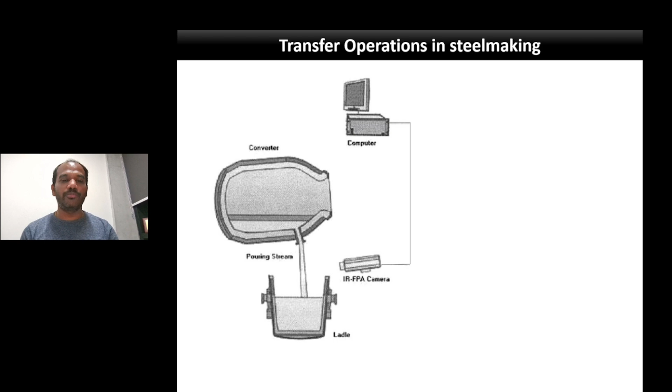So moving into the topic, we can see transfer operations are very important in steel making. There are several places where transfer operations take place. We can see transfer of liquid steel from BOF converter to ladle, also transfer of liquid steel from electric arc furnace to ladle, which is named as the tapping process. This takes place at the primary steel making section. As soon as the crude steel is produced, the tapping operation takes place to transfer the liquid metal from one vessel to another vessel.

Another transfer operation that takes place in the steel making process is during continuous casting, where the liquid steel is transferred from ladle to tundish, and then tundish to continuous casting mold. So the difference between these two transfer operations is that one takes place at the early stage of steel making, and the other, that is teeming, takes place at the later stage of steel making.

In case of teeming, mere entrainment of slag itself is very dangerous, because that is going to give you exogenous inclusions in the steel products. However, in case of tapping, you can allow some slag carryover to some extent, because the slag carrying over from converter to ladle will be at a high temperature, and it can help in dissolving some fluxes, and it can cover the liquid steel so that it can prevent reoxidation and so on. So there are some advantages to that.

However, the disadvantage is that the BOF slag carrying over into the ladle has a lot of excess oxygen that comes from reducible oxides like FeO, MnO, P2O5. So there is always a trade-off of how much slag carryover to allow, and for several critical steel grades, slag-free tapping is demanded as much as possible.

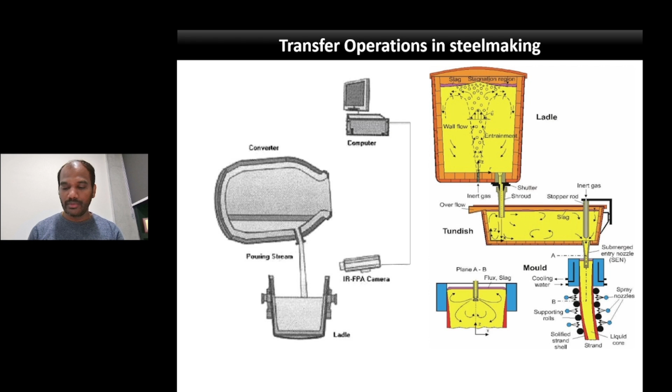So our work primarily focused on the tapping process, that is the transfer operation that involves the transfer of liquid steel from converter to ladle.

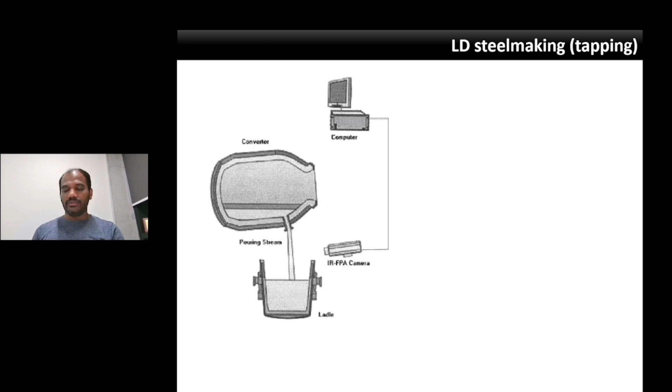We know that crude steel is produced along with BOF slag, and during tapping, generally there is a practice that deoxidizers are added - aluminum, silicon, manganese - and some amount of slag formers are also added, like calcium aluminate slag, some synthetic slag of different compositions, and so on.

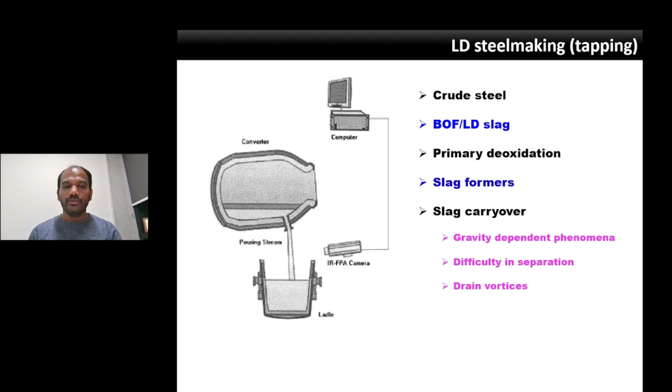So as soon as the tapping is going to be over, at the end of the tapping process, because of a gravity dependent phenomenon, vortex formation takes place. And once this vortex formation is incepted, the upper phase, that is the slag, gets carried over into the stream that is going into the ladle. So this process is basically called slag carryover.

There is a difficulty in separation because it is highly gravity dependent, and the drain vortices, which are beyond the control of any operator, form for a lot of reasons. So all these things make slag carryover one of the complex phenomena in the steel making process, which requires very precise control to ensure the quality of the steel.

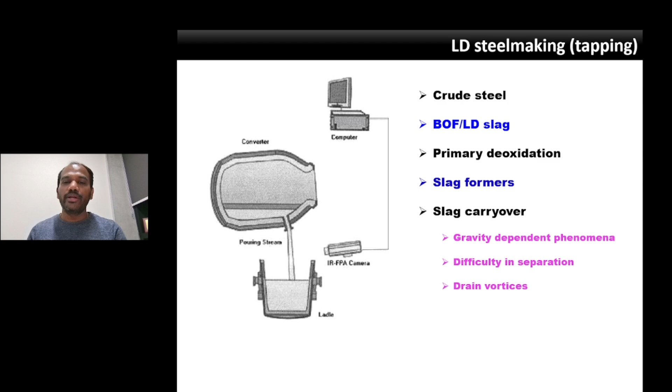There are control methods available. We can see here a dart, which is a device placed at the top, right above the tap hole, and which has a specific gravity between the slag and liquid steel, expected to occupy the interface so that the drain vortices can be destabilized.

And there are IR cameras, as shown in the slide. This IR camera will be focused towards the stream, and the thermal imaging will be continuously obtained. Once the slag is entrained, the thermal images signal will be different, so that the operator can take action by tilting back the BOF converter. These are how today's practice happens in the steel industry for control of slag carryover.

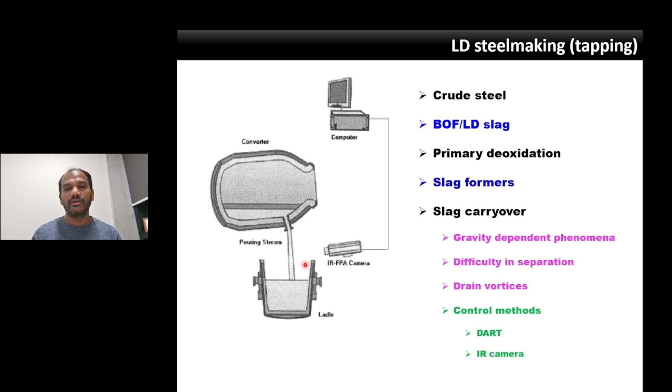Given this background, we will be moving into the problem definition that is defined here. You can see the slag carryover during the tapping process. That is one of the phenomena that is very much of interest here.

Through vortex formation, the slag carryover takes place, and as soon as the liquid steel stream is exposed to the atmosphere, the stream will be attached to a hot air film, and atmospheric air will be entrained through this stream, and there is oxygen and nitrogen transfer into the liquid steel from the atmosphere. This is the second phenomena taking place when the stream is exposed to atmosphere.

The first phenomena is carryover of an oxidizing slag, and the second is the entrainment of air and diffusion of oxygen and nitrogen through this boundary layer. Finally, the liquid steel can be cylindrical, or it can break into multiple droplets, and the surface area increases, which can encourage more entrainment.

So if you see this process, a lot of excess oxygen is basically going into the ladle. Oxygen inputs: one is through slag carryover, another is through atmospheric interaction, and another is dissolved oxygen always present in the crude steel. These are all the amounts of excess oxygen which will cost your deoxidizer in the later stages, all coming into the ladle during the tapping process.

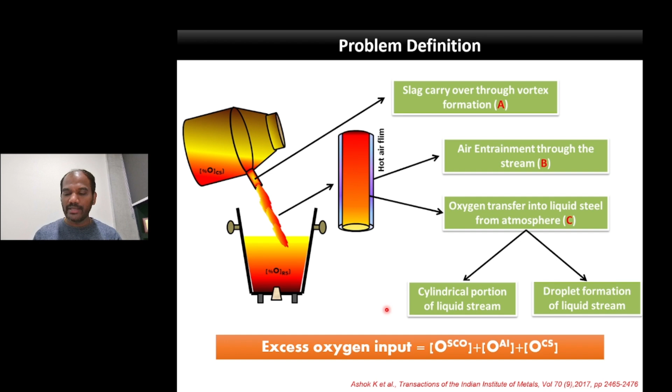In order to do that, you need extensive data from the industry. Looking at the process of tapping, the inputs of this process are the initial temperature, tapping temperature, and the crude steel composition. The BOF slag weight going in is what is going to be my unknown, which I am going to calculate through FactSage calculations. And the tapping additions, how much is added in every heat: deoxidizer, lime, synthetic slag, these all.

Crude steel composition also - it's not always possible to get the weight percent oxygen. So we have computed it in such a way, the program is set up in the equilibrium calculations so that initially we will also calculate the weight percent oxygen, and then go for estimation of slag carryover.

So finally, the output of the process is the LF temperature. Once the tapping temperature and after the process, once the ladle reaches the ladle furnace, what is the temperature? That is the final temperature for our calculation in the equilibrium module.

And the refined steel composition and the weight percent oxygen, including the weight percent oxygen, and the final slag composition weight - so this is basically an input. The list of inputs, if you give in an equilibrium model, this list of outputs basically comes out through the equilibrium module of FactSage.

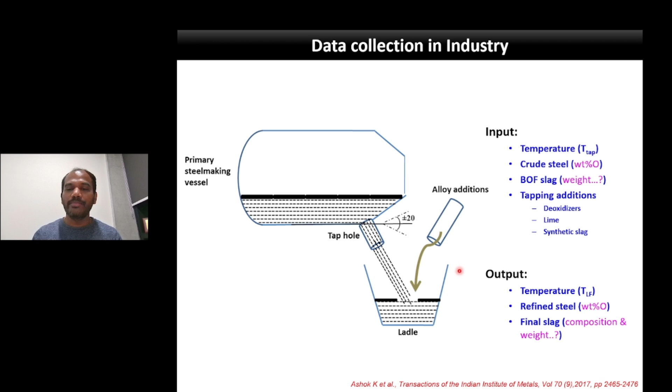Doing some exercise, one can calculate it's basically an equilibrium, thermal and mass balance along with the chemical reactions. One can perform this calculation and then estimate basically the slag carryover. I'll just explain in the next slide how that has been done.

As I told, the equilibrium module is what is used. That is basically the heart of this calculation. Begin with you have to go from this green box first - you start the simulation process. You give the input of steel composition, slag composition, and the tapping temperature, get into the equilibrium module, and the output is calculated.

Equilibrated steel and slag composition at tapping temperature - this equilibration is essential here because to estimate the weight percent oxygen exactly present in the liquid steel, because that is most of the time unknown in the steel industry.

For all the inputs, what they generally may know is the final carbon content. So given this carbon content, equilibrating the liquid steel, that is the crude steel, with the slag composition, and estimate what is the weight percent oxygen present in it.

The close bracket with the A, that we put as a variable, and then deoxidizers whatever added in the tapping process, like silicon and manganese, all these things can be given as an input again into the equilibrium module.

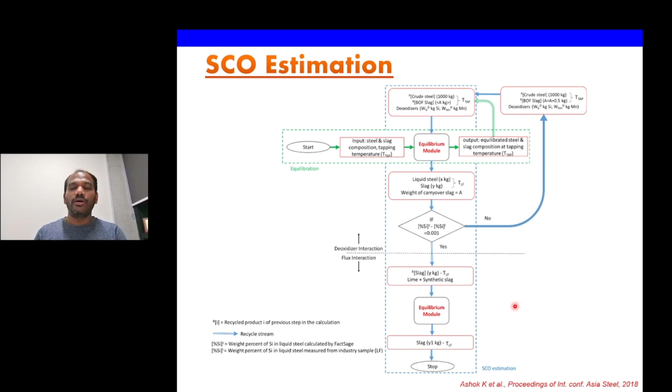So the results are given here. Close to some 150 industry heat data we have taken, and then we computed through FactSage, and then we could calculate the slag carryover amount. You can see that varies from 0 to 6 kilogram per ton, and different grades are given here.

With respect to different grades, we can see some grades are always lower, and some grades actually increase, and the grades are arranged in such a way that the slag carryover increases from 2 kilogram per ton to 6 kilogram per ton.

But interestingly, if you note down these grades, which basically talk about it as you move from left to right in this direction, the end carbon and the end phosphorus are less when you are moving from the left side to the right side.

It means if the BOF practice involves maximum carbon and phosphorus to be removed, then basically you are ending up with more slag carryover.

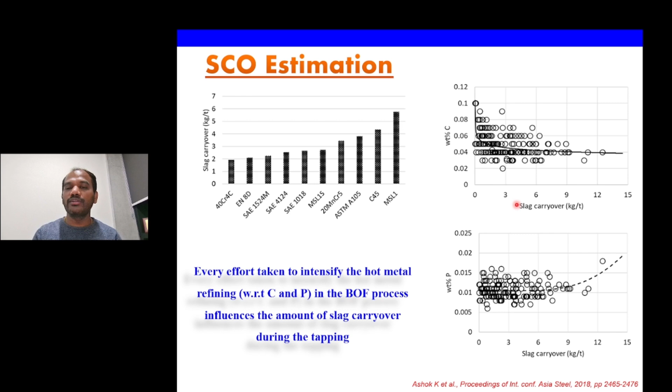Here there are some intentions given with weight percent carbon and weight percent phosphorus. These are all some obvious conclusions that we got from the results.

And the slag carryover predicted has been compared with an empirical relation with the FactSage estimated slag carryover, with the coefficients given here.

And you can see till 5 kilogram per ton the prediction success is somewhat okay. However, beyond 5 kilogram per ton the prediction success is very poor.

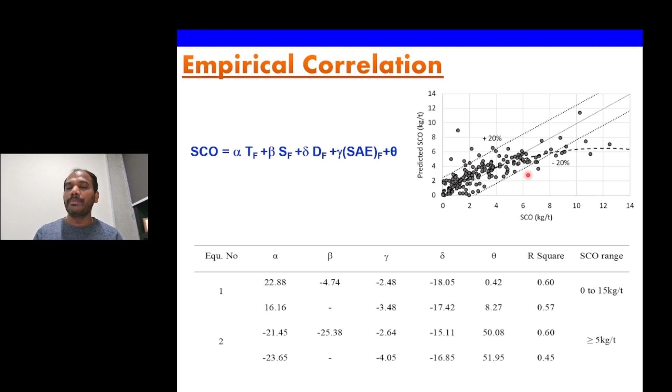And this is the slag path, how it is actually traveled. You can see this is the BOF slag composition regime, A1 and A2. A1 is completely liquid and A2 is liquid slag plus some saturated MgO.

And when basically the deoxidizers are added, the BOF slag moves to this regime of liquid slag plus dicalcium silicate, or regime B, where the liquid slag is there.

And upon the flux additions, this B and C regime compositions are moving to a final composition of D and F. This is how the slag path travels in case of the tapping process.

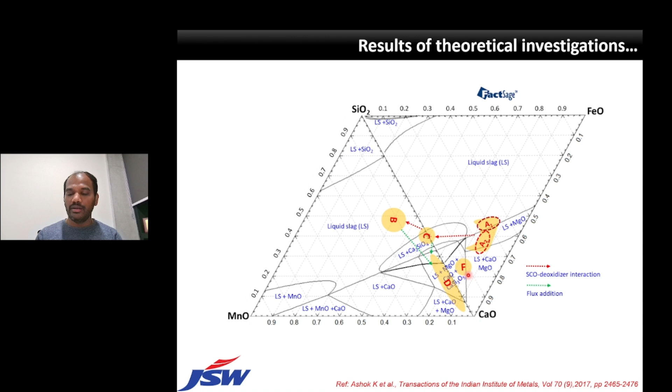You can see the slag carryover is very sensitive to certain parameters we have analyzed. One parameter is the temperature difference between tapping and the LF process. For zone A1, slag carryover greater than 5 kilogram per ton occurs outside the region of less than 80 degrees and greater than 100 degrees, which shows higher slag carryover.

This temperature can be indirectly connected to the interfacial tension. We know that interfacial tension plays a major role in bringing vortex formation. Another inference from slag carryover, plotted for all heats with the sulfur to carbon ratio, is that sulfur and carbon are interstitial elements present in liquid steel which can also bring changes to the interfacial tension.

The conditions established here for zone A2 slag carryover, BOF slag for less than 5 kilogram per ton, require the ratio to be 0.95. So primarily, the observation is that the interfacial tension involved can be controlled by several parameters, more importantly temperature and the impurities present in liquid steel, which has a major influence on the slag carryover.

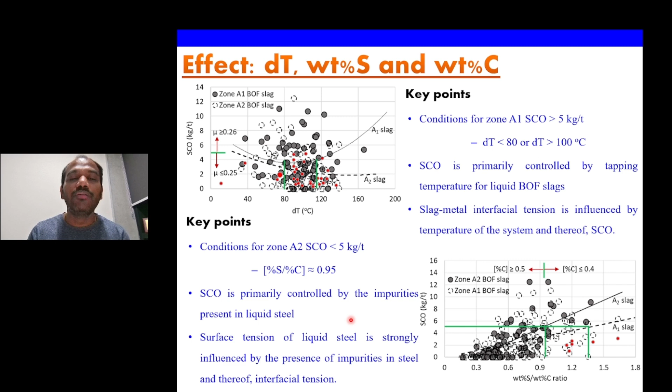Importance of excess oxygen in slag carryover estimation, I think I need not emphasize to this audience, because all of us must be very much aware about it. We want clean steel, and it has to be slag-free tapping.

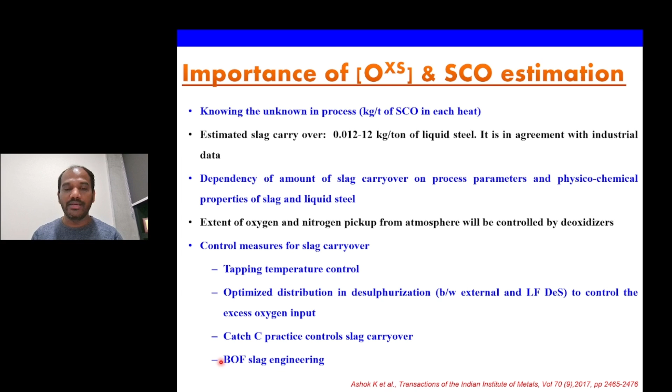Based on these investigations, we propose certain control measures for slag carryover: tapping temperature control, optimizing the distribution in desulphurization between external and LF desulphurization to control excess oxygen input, and some catch carbon practice can be followed. BOF slag engineering can be done, and we wanted to validate this.

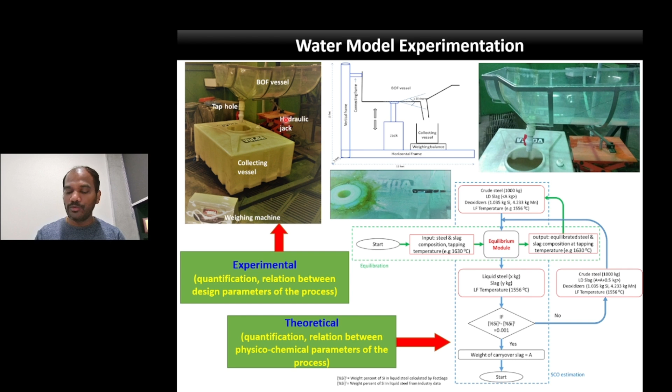So the water model experiments were planned. The schematic pictures of those models are given here, and the results are validated here. You can see this is the BOF slag regime, and the carryover ratio is nothing but kilogram per ton.

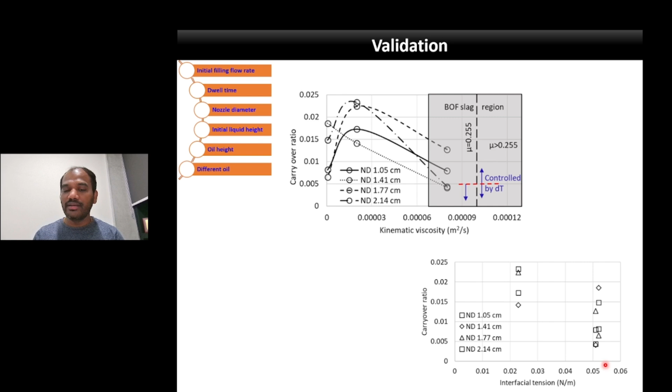You can see as the kinematic viscosity increases, your slag carryover decreases. Another inference from here, when we plot it with interfacial tension, it is very clear that as the interfacial tension increases, the slag carryover decreases. All these results are in very much agreement with the FactSage results, and we went forward for industry trials.

You can see phosphorus reversion is one of the indices for slag carryover, which was very random before adopting our change in practice.

The change in practice is addition of lime towards slag engineering with respect to the tapping temperature. If the tapping temperature increases, the amount of lime added also increases, and addition of lime basically decreases the viscosity of the slag. Altogether, for a one month trial, we could see the phosphorus reversion is very much in control.

You can see it is always less than 100 ppm. I can say till date, getting less than 100 ppm phosphorus in crude steel is a challenging task, but we could consistently get less than 100 ppm for all grades after adopting this practice of slag engineering to control the slag carryover.

So the learning is: increasing the temperature and the basicity basically decreases the viscosity of the BOF slag. That increases the interfacial tension, and hence the slag carryover decreases.

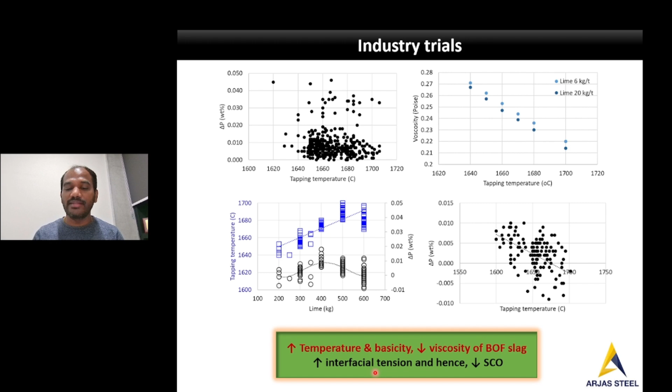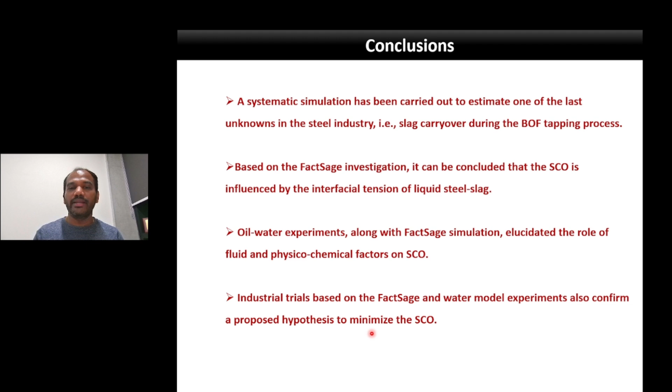I would like to conclude here. We have conducted very systematic work using FactSage simulation to understand the slag carryover process. Based on the FactSage investigation, the slag carryover is actually influenced by interfacial tensions of the liquid steel and the slag, and water model experiments have also confirmed the same thing. Based on all these understandings, we went to industry trials to confirm that there is a strategy to control the slag carryover by slag engineering.

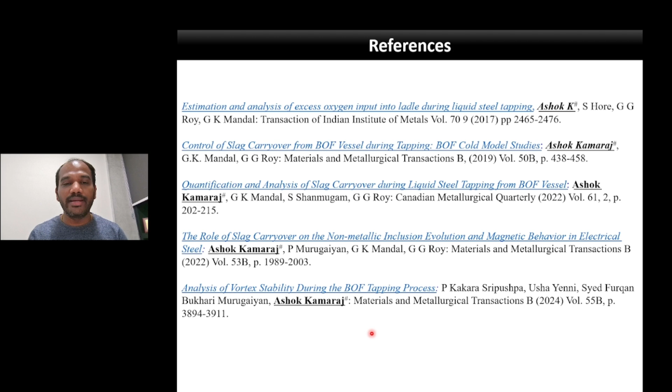I would like to give the list of publications that we have done in this area. There are very detailed investigations using thermodynamic modeling, water modeling, and the role of slag carryover on non-metallic inclusions in electrical steel. If anyone of you is interested, please go through it.